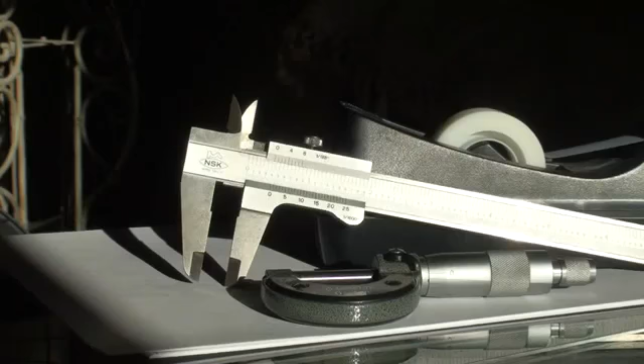Alright, today we're going to talk about how to read vernier calipers and micrometers. Today we're just going to do the vernier calipers.

This here is a 0 to 1 inch micrometer, and this one actually reads in 1/10,000th of an inch. And this is a vernier caliper. It reads in 1/1000th of an inch on the bottom and 1/128th of an inch on the top. But for today we're just going to go over the 1/1000th inches.

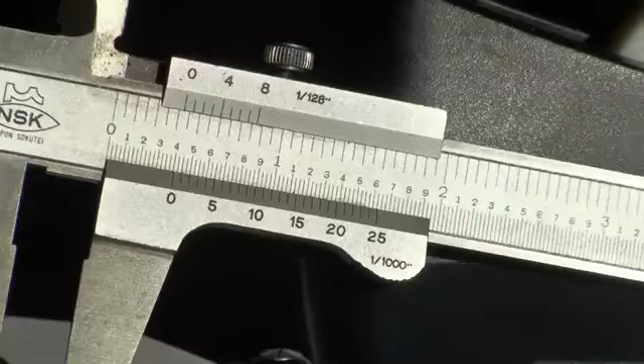So 1,000, 1/1000th to 1 inch. So that means that if you look at the scale here, I'll zoom in on this here for you guys. There we go. You can see that it is a scale of 0 to 25 on this bottom scale, and it reads in 1/1000th of an inch. This top scale reads in 1/128th of an inch.

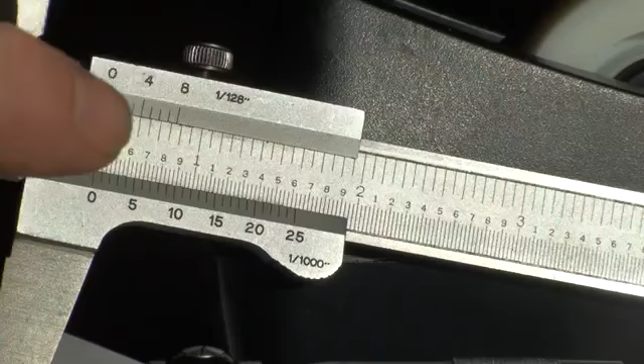So there's 128 divisions in this inch on this scale, and 1,000 divisions of an inch on this scale. So this, of course, will be way finer, and this is mostly what mechanics uses this scale here.

Okay, how to read this. I'll take this one out of our way. And you see the bottom scale, it's in 1 inch is divided into 10. So there's 1, 2, 3, 4, 5, 6, 7, 8, 9, and 1 inch. And this scale is divided into 25 increments. So if you look on this first part here,

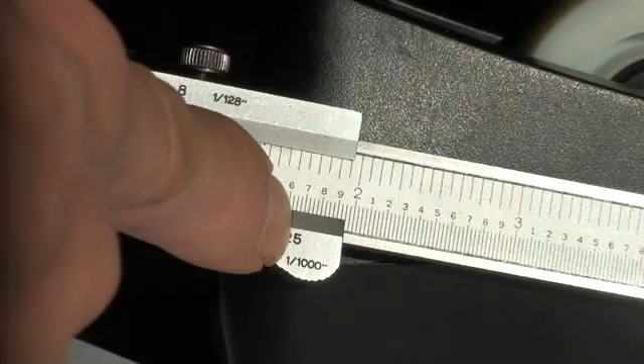every division or every line is 1 scale length of this scale. And that's how you'll read all calipers of this style. So 25 1/1000ths is equal to the first line. So from 0 to the first line is 25, or one of these scales. From the second line to the third line is 25 of these scales. Third to the fourth, 25 of these scales, and so on.

So if your 0 lines up with the 0, of course it's 0. If you move it along to the first line, if the 0 lines up with the first line, you'll have 25 1/1000ths of an inch. That would be, if you were to write it, it would be 0.025. So let's try that.

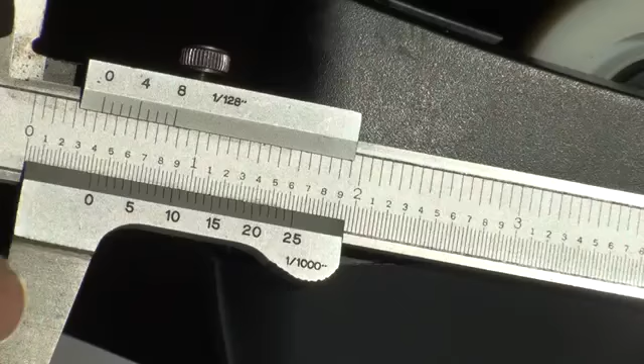I'll show you exactly where that is. So right there, the 0 lines up with the first line. It is 25 thousandths of an inch, 1/1000th of an inch, or 0.025 of an inch. The scale of 25 isn't counted right now because the 0 lines up.

If we go to the next line, which is the second line, that would be 25 there, another 25. So that's 50 1/1000ths, which we've written 0.050 of an inch in thousandths.

The next one would be another 25. Another scale of this goes into there. It's at the 0, so it's 75 thousandths. 25, 50, 75. 75 1/1000ths of an inch, or 0.075.

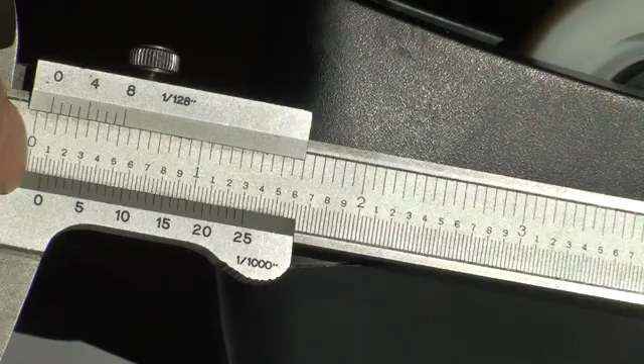Go one more. That's 1, 2, 3, 4 times 25. 4 25s is 100 1/1000ths of an inch, or 0.100 would be the way you would write it.

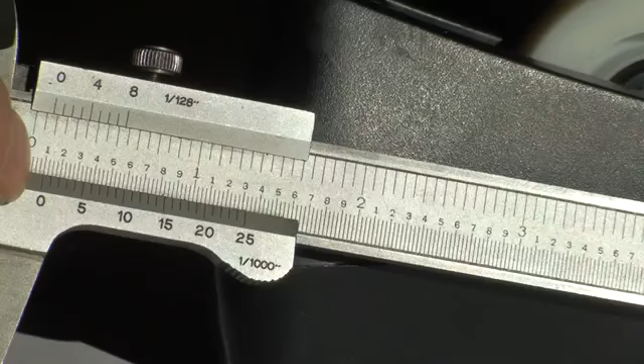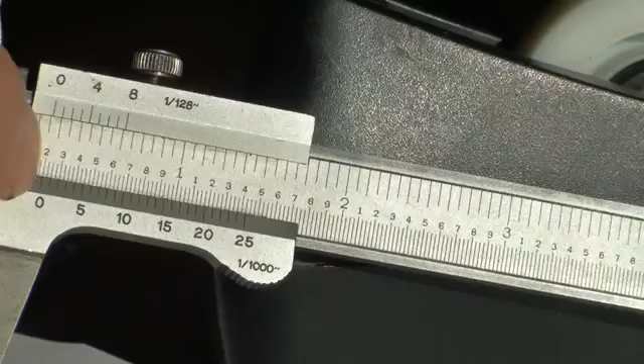If you advance along here to the 200, so it's 25 for every increment again. So it's 1, 2, 3, 4, 5, 6, 7, 8. 8 25s is 200, 200 1/1000ths of an inch. Of course, we already have the 2 there, so we don't have to count it manually. So 200 1/1000ths of an inch.

And as we go on, 300, 400, 500. See the 0s lining up with the 5 on the bottom scale. Don't even look at the top scale. Look strictly at the bottom scale. Sorry, I moved just a bit there.

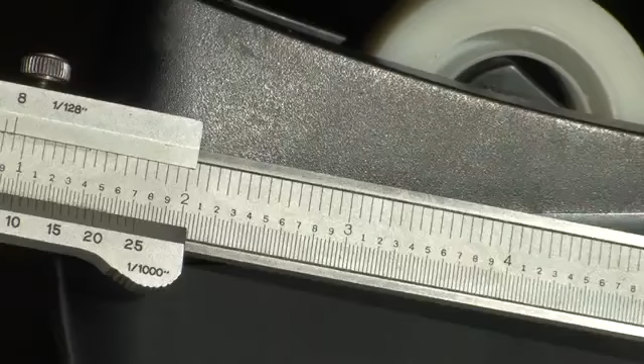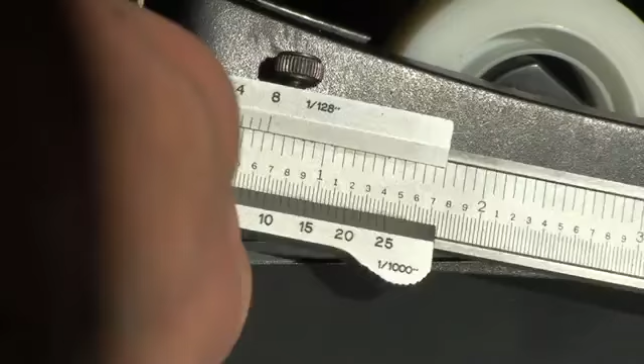Okay, now we have to take into account these 25. I'll show you how that works now. So if we go back to 0, it's 0, so 0 1,000ths of an inch. So I told you every increment here is one scale, this, or 25 1,000ths.

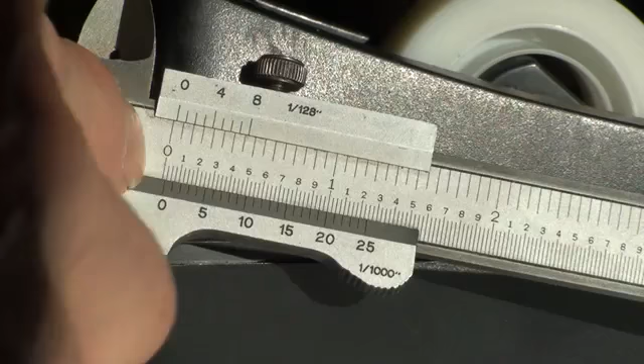So when we read this bottom scale, if it's less than the 25, see now the 0 doesn't make it to the 25, then we refer to this bottom scale. So we look at which line lines up on this bottom scale. So the 0 is passed. We're just looking for a line that lines up. The 1 is passed. The 5 doesn't line up with any. 6 doesn't line up. 7, no. 10. 10, oh, 10 is really close to lining up.

Let's see, the 9 is passed. The 10, oh, a little bit past. 11, a little bit past too. 12, perfect, so 12 lines up. We don't care what these numbers are saying here.

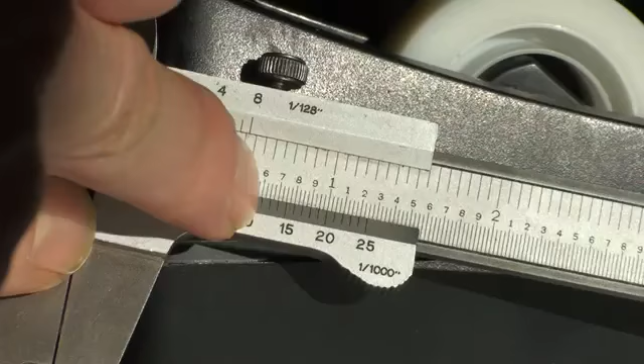We're just reading the bottom because we know that every increment over on this side is 25 of these, so it's under 25. Now we go to this scale and say the 12 lines up with a line. So now it is 12 thousandths of an inch because it's under the 25. So you would write that as 0.012 of an inch, 12 thousandths of an inch.

Now let's go to the 25 and past it. So now the 0 is past the 25, so we count the 25. It's the first 25, so one of these scales is in, and we're to the 25. So that's 25, and now it doesn't line up with the next one. It doesn't make it to the next 25, which would be 50.

So we go to this bottom scale and look for what lines up. 0 doesn't line up, 5 doesn't line up, 10 doesn't line up, it's still before it. 15 is it, or possibly 16. Vernier calipers, you kind of get within a thou or two, so it's not totally that accurate, but it's close enough for most quick things. So I would say the 16 lines up best.

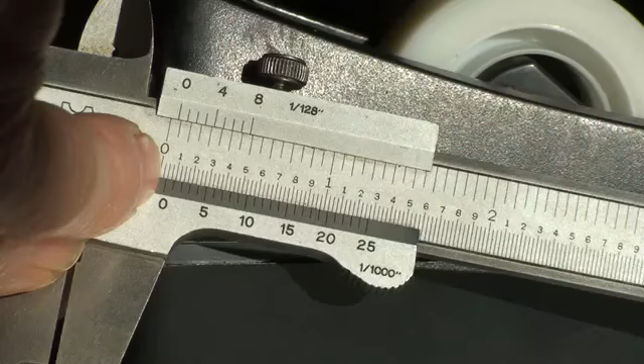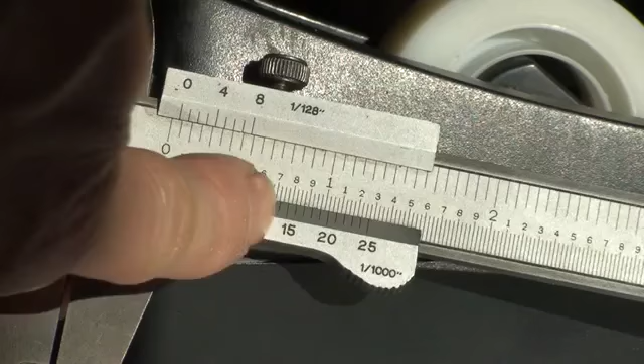So now we have 25 because we're past the first line, but it doesn't make it to the second line, which would be 50. So we go 25 plus 16. 25 plus 16 is 35, 40, and 1, 41. So 41 thousandths of an inch, 0.041 of an inch.

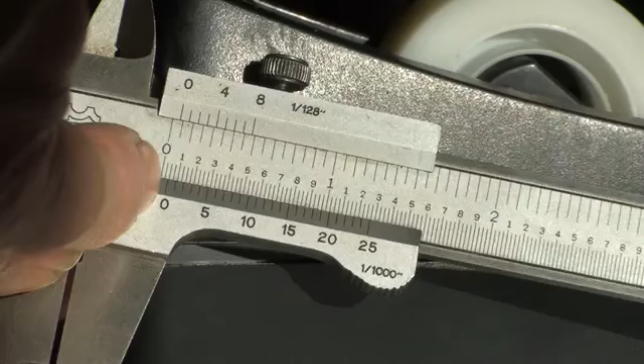And there you have it, it's as simple as that. So now you can read any measurement there. Say we put it up to here, we look at the 0. So what do we have here? It's past the first line. The 0 lines up with what? It's past the 3, which would be 300 thousandths, right?

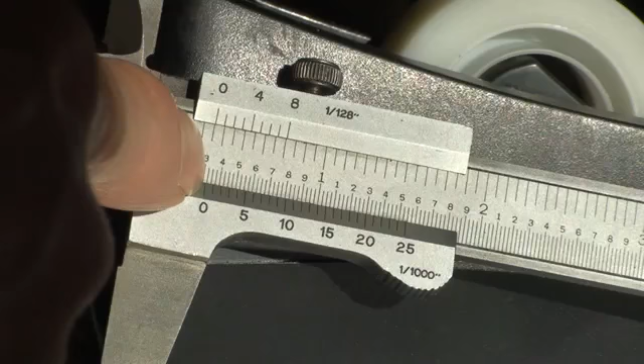25, 50, 75, 100, 200, 300. Counting 1, 2, 3, 4, 5, 6, 7, 8, 9, 10, 11, 12. 12 25s are 300, and the 0 is past the 3. So now we have to look at the bottom scale. So we know it's 0.300. If the 0 lined up with the 300 or with the 3, it'll be 300 thousandths. And it's past the 3.

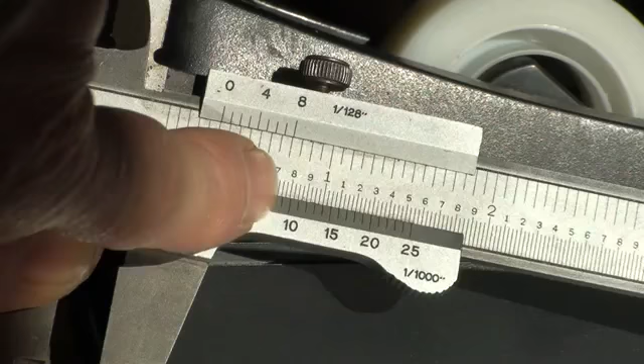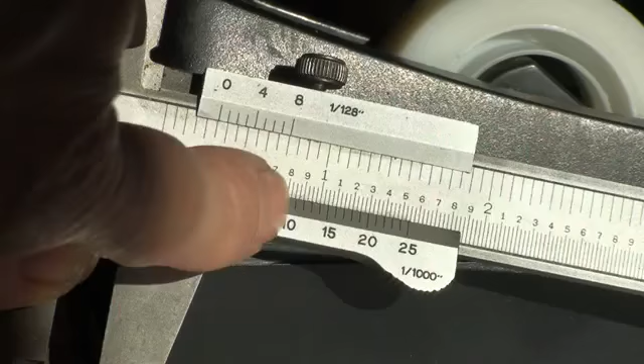How much is it past the 3? Well, we have to look and see which of the bottom lines lines up. We know the 0 is passed, 5 is passed. Oh, 10 is the other side. What lines up? No, 10 is passed too, sorry. 11. So the 11 on this scale lines up with one of these lines. So we keep track, and it's 300 plus the 11, so 311 thousandths of an inch.

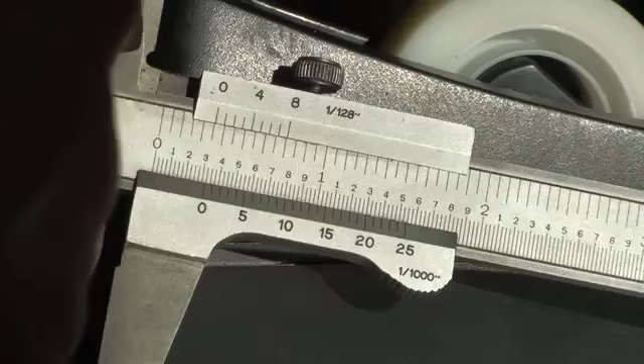So 0.311 of an inch, 0.311. Now if we extend it all the way till it passes the 1 inch increment, remember we're not looking at the top scale, this is a different scale altogether. We're looking at the bottom scale only, the thousandths. So let's go over to there.

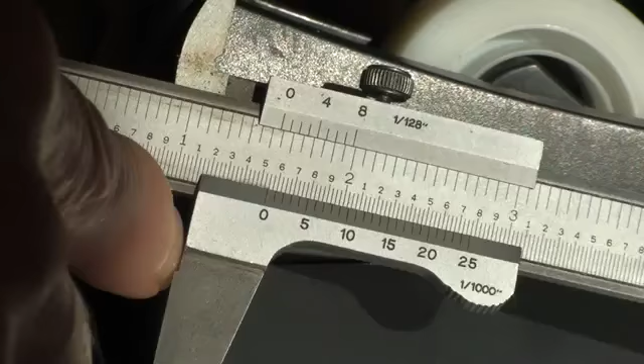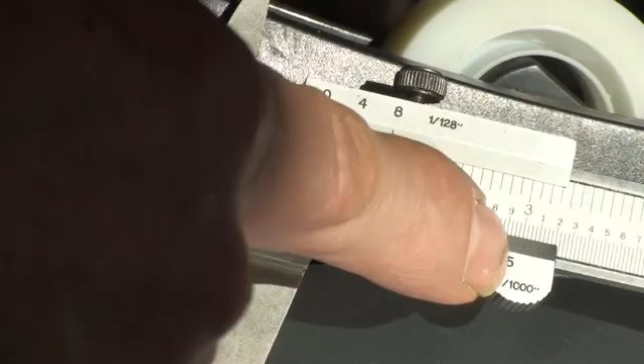Okay, let's go a little more, let's go here. So now we know the 0 is past the 1 inch, so it's 1 point something now. It's past the 1 inch. So now we read, after we pass the 1 inch, we read the scale again. And when we made it to the 1 inch, we realized it's past the 1,000. So we have 1,000 thousandths, which equal 1 or 1 inch, plus whatever we go.

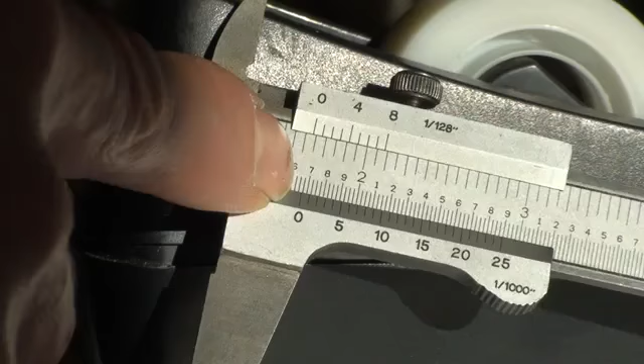So each one is 25, plus the 1 inch: 25, 50, 75, 100. So we can go to the 200, 300, 400. We're looking to where the 0 lines up. 500, 600, it's past the 600, it's past the 25, it's past the 50, but it's not to the 75, so it's before the 75. So we have 1 inch, 0.6, 25, 50, so 0.650, and then we have to look at the bottom scale to see what lines up. It's past the 5.

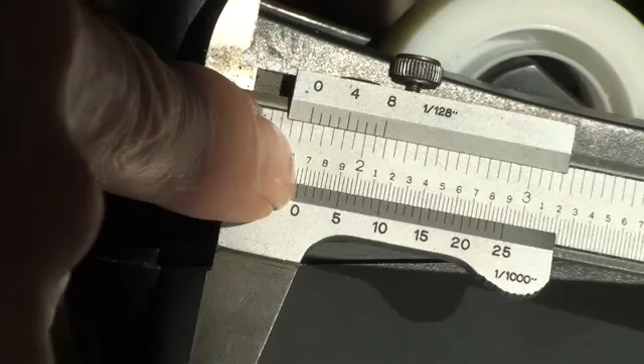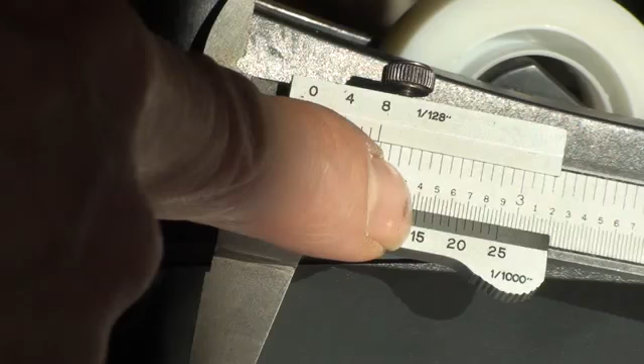I would say the 15 is the closest one, so 15 lines up with a line, so we go back to the 0: 625, 50, so 650 and 15, so 650, 675 - I'm sorry, 665, so 665 thou, so it's 1.665. And there you have it. Now you know how to read a vernier caliper in the 1/1000.